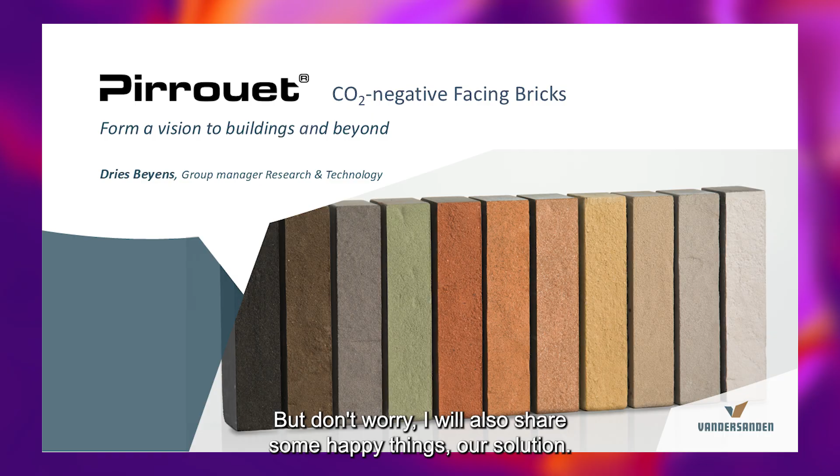My name is Dries Beyens. I'm the leader of the Research and Technology Department of Pirrouet, our new technology. I will start, but first I will tell you that I do not have good news all the time. I will start my keynote with some disturbing news and disturbing facts. But don't worry, I will also bring some happy things, our solution. So before everybody is depressed, we will bring the good news.

Okay, what are the problems or the challenges that we have today? First, in 2019, we had the COVID pandemic, then the recession, followed by climate change, because it was more a hot topic, and then biodiversity became more important, and for several years now, we also have wars taking place.

At Vandersanden, I go a little bit more into detail about climate change, because we as Vandersanden are a facing brick company. So we use natural gas and we have an impact on climate change. But we can also have a positive impact, of course, with our solution.

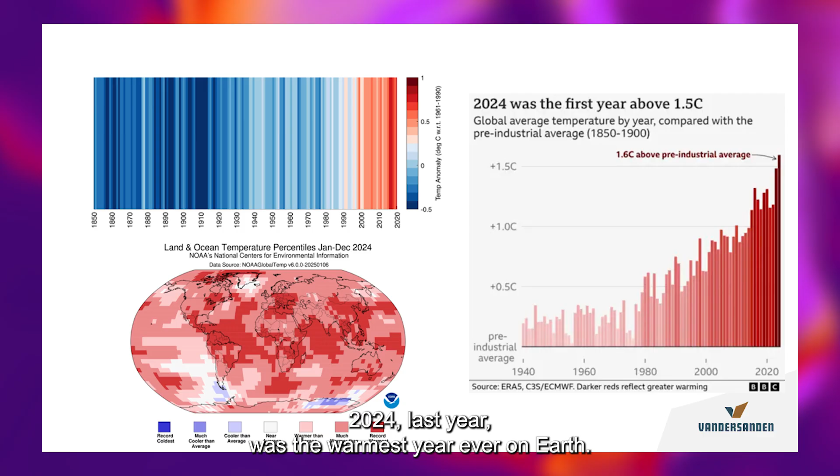Some facts, some figures. I won't go too much into detail, but the right graph on the slide is maybe the most important graph. 2024, last year, was the warmest year ever on Earth. And for the first time, the temperature increase was more than 1.5 degrees C compared with the pre-industrial period. Also on that graph, you see that the last 10 warmest years all occurred since 2015.

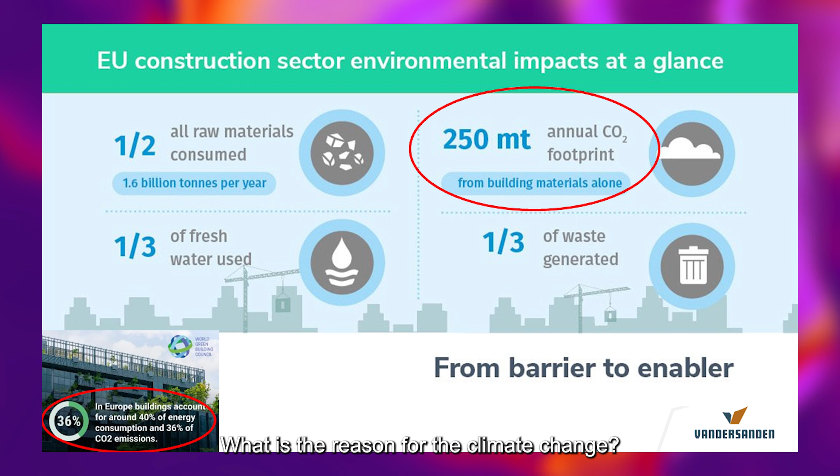So what are the consequences or the causes? We all know the weather is changing, with some terrible consequences. What is the reason for climate change? That's of course the CO2 emissions in the atmosphere. We in Europe are responsible for 250 megatons a year from the production of building materials. The total building and construction industry is responsible for 36%, so one third of the total CO2 emissions is because of the building and construction industry.

Everybody is still happy, I see. No? Yes? Now I come with the good news. I come to our solution.

As Darwin said, how should we react? It's not the strongest or the most intelligent one that will survive, but the one that is most adaptable to manage change. That is how we as Vandersanden act and react, with our long-term vision on sustainable solutions and strategies.

We as Vandersanden are a 4th-generation company, and this year we exist 100 years. We are not thinking in years, we really think in generations. That is how we act as Vandersanden. This strategy gives us a leading position in sustainability and innovation, with our slogan, for decades long, together we build greatness. In this philosophy, we developed our sustainable program, Together to Zero.

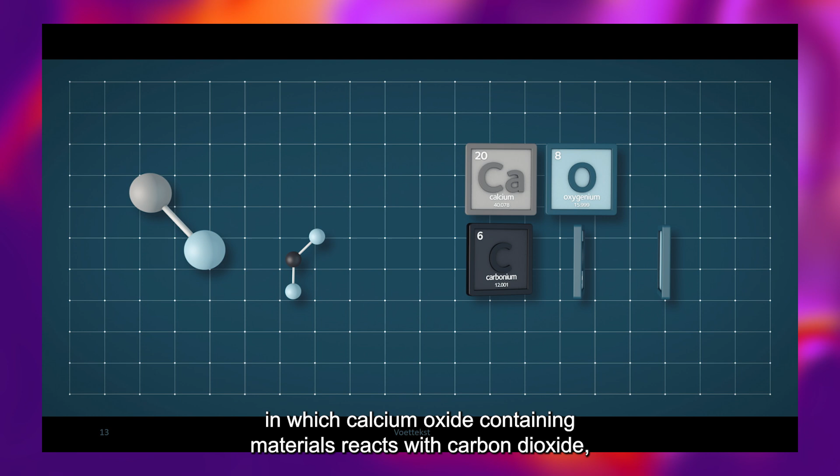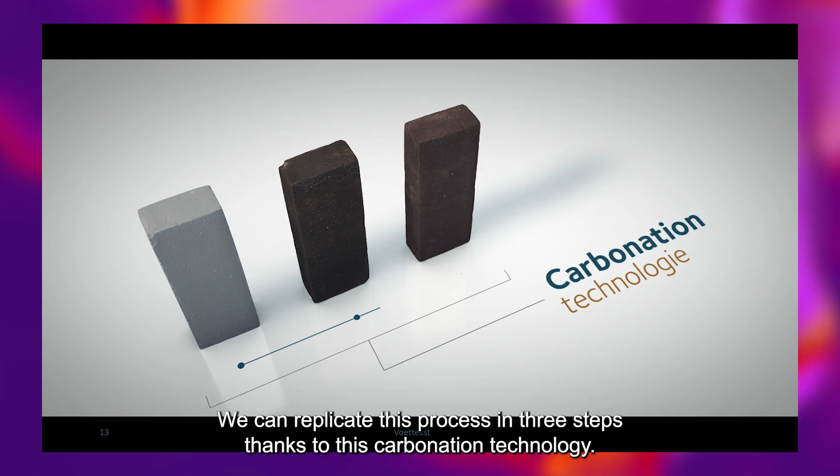Carbonation is a chemical process in which calcium oxide-containing materials react with carbon dioxide, forming insoluble calcium carbonate. We can replicate this process in 3 steps thanks to this carbonation technology. In the first step, we mix mineral waste products from the steel industry, sand, any colorants, and water. This saves up to 80% on primary raw materials.

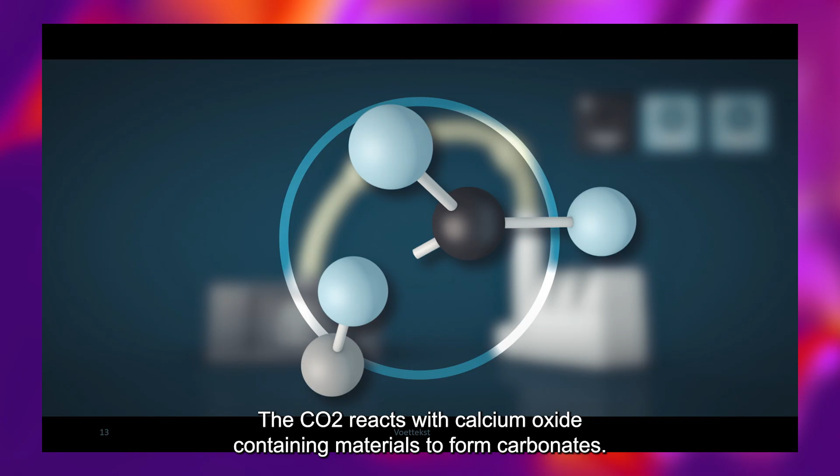During this process, as much as 60 kilograms of CO2 per ton of finished product is absorbed and captured. This process takes 1 or 2 days, does not require any additional energy, and does not produce any waste. With the production of the CO2-negative Pirrouet facing bricks, Vandersanden is taking the next step in changing its production processes for a sustainable future.

A small summarization about the production process. So how does it work? We mix sustainable, low-impact materials. They are minerals from the steel industry. We mix that and we don't use any other binders. So we don't use cements or geopolymers to bind it, only the raw materials that we get from the steel industry. We press them with green energy.

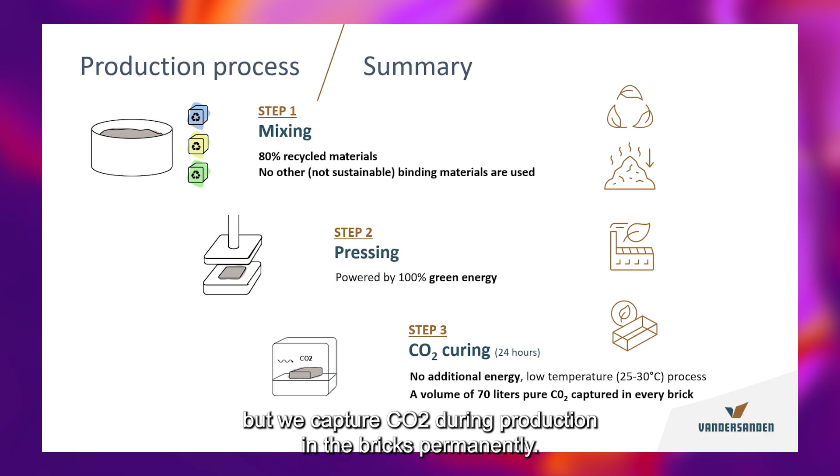All the processes are consuming low energy, also fully electrical, and we have our own green energy because we have our windmill and solar panels on site. The third step is the curing process when they are formed, and in the curing, we don't emit CO2 for the production, but we capture CO2 during production in the bricks permanently. So every facing brick around this size will capture during the curing a balloon of 70 liters of pure CO2.

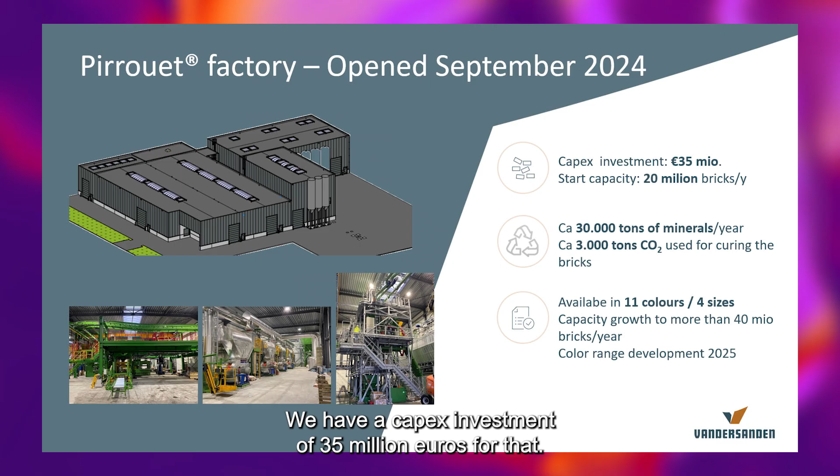Then we built a factory for it. The factory opened last year in September. We have a capex investment of 35 million euros for that. The startup capacity is 20 million bricks a year. We can scale up to more than 40 million bricks a year. We use for that 30,000 tons of minerals, and we use for the curing 3,000 tons of CO2. 3,000 tons is comparable with what 115,000 trees will absorb in 1 year. So it's amazing.

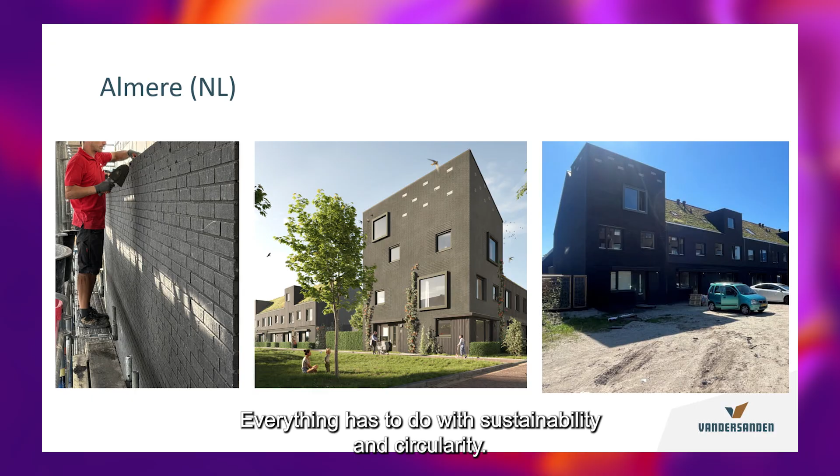Some of our first references: a big project in the Netherlands, our first project in Almere, where everything has to do with sustainability and circularity. These were 60 family houses. They used our Pirrouet bricks. They used hemp insulation. You see on the render the green roofs, and to promote biodiversity, they also put some birdhouses upstairs in the roof. It's very popular in the Netherlands at this moment.

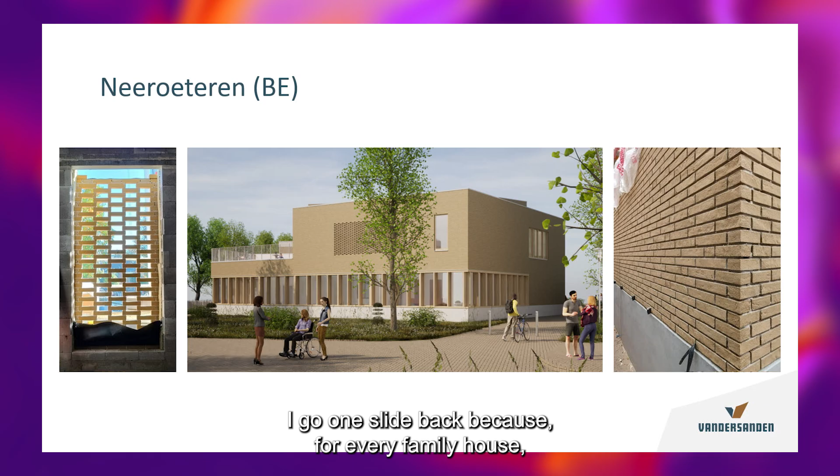I go 1 slide back because for every family house made with Pirrouet bricks, the CO2 uptake is permanent, so it will not escape anymore during lifetime and also not after lifetime. 1 family house with Pirrouet bricks is the same as what 1 tree absorbs in 28 years. Our next reference in the east of Belgium, in the Neeroeteren Cultural Centrum, they masoned the bricks with lime mortar. So they look to the lifetime and they are able to reuse the bricks after lifetime.

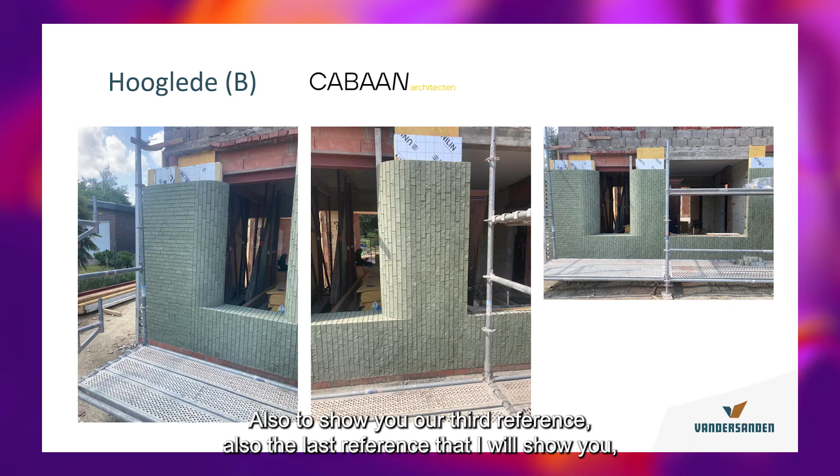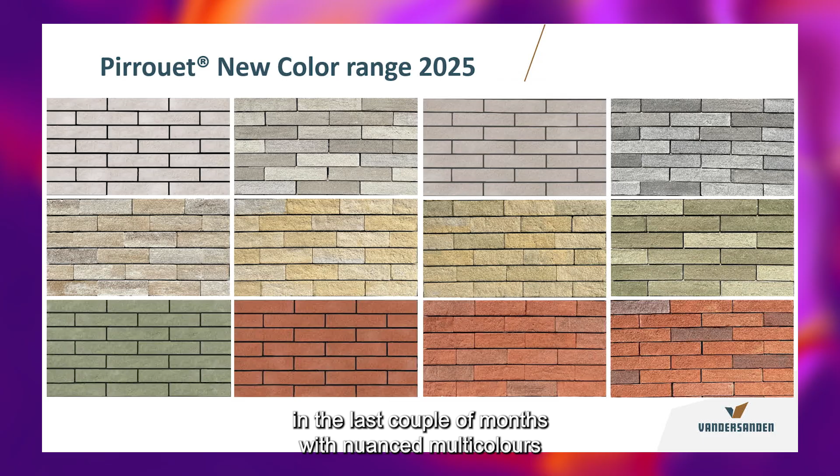This is our third reference, also the last reference that I will show you. With our Pirrouet bricks, it's a renovation project. So you can see that renovations are also very good to use the Pirrouet bricks. This is our new color range that we developed in the last couple of months with nuanced multicolors that give a warm ceramic look and feel.

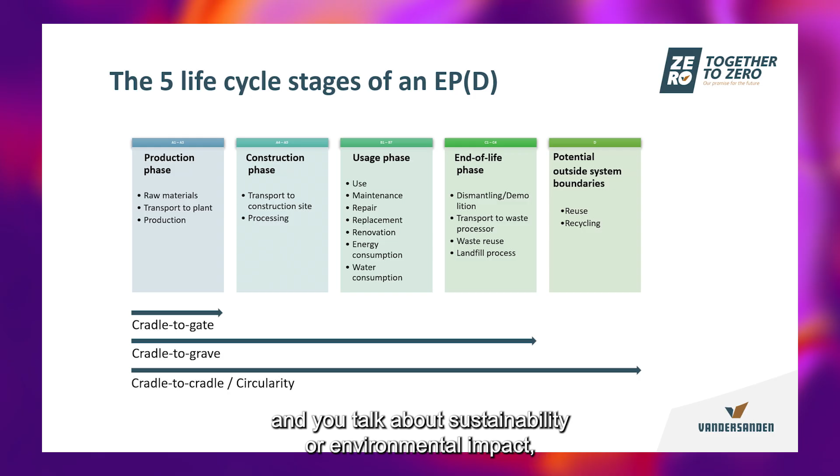Then how sustainable are they? I told several times already, they are carbon negative facing bricks, but I don't want to tell a greenwashing story, so I will explain and prove that they are sustainable and CO2 negative from cradle to gate in the production phase. When you look at products, not only building products, and you talk about sustainability or environmental impact, you not only look at the production phase, but also at the other phases, the whole LCA, the life cycle of the product, of course.

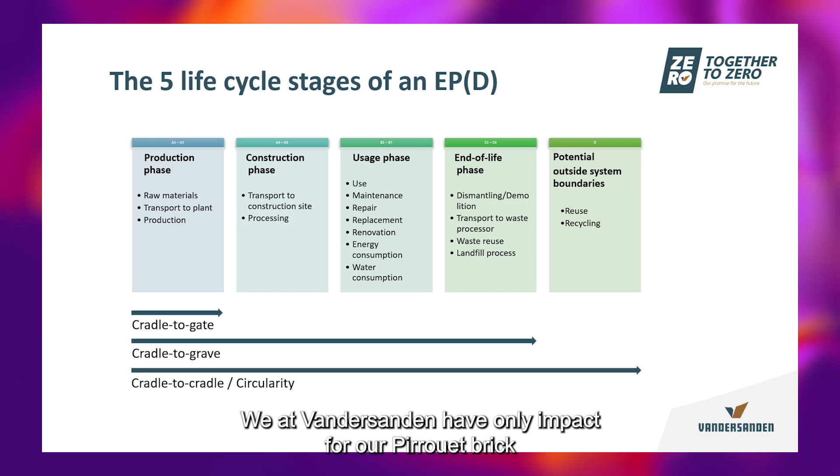We as Vandersanden have only impact for our Pirrouet brick in the production phase, from cradle to gate. So now I'll show you an infographic out of our official sustainable impact documents to prove that it's CO2 negative. The production phase, cradle to gate, has 3 parts. The A1 part, resources extraction of our raw materials. This will have an impact of around 13 kilograms CO2 per 1,000 kilograms of bricks.

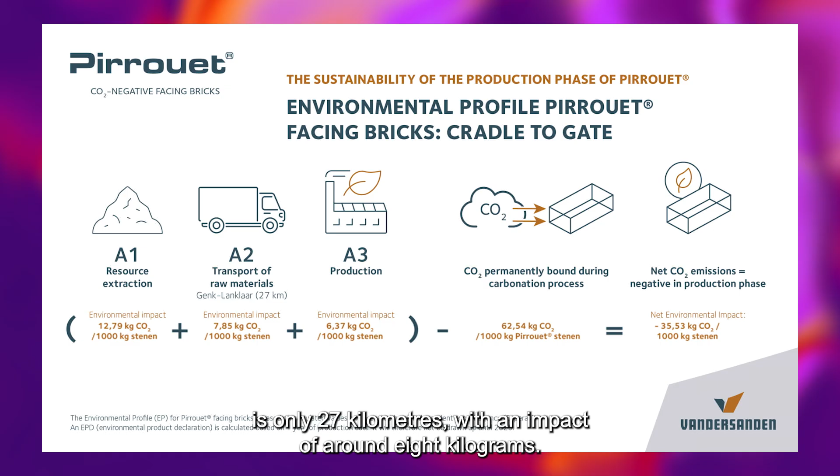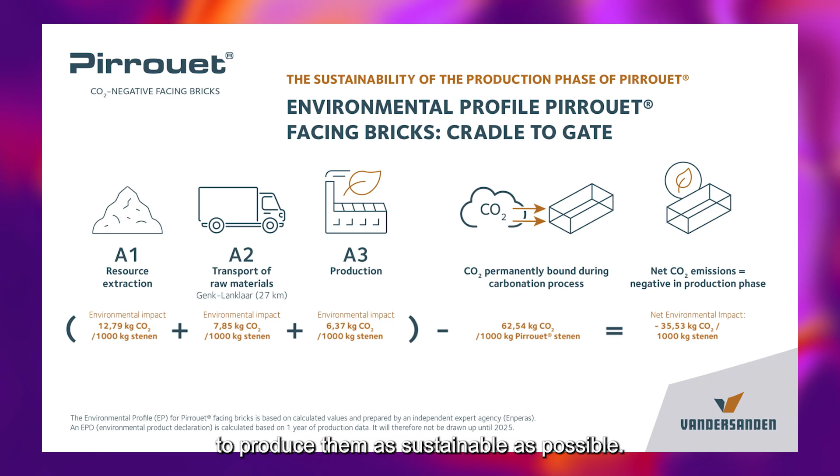The transport from Genk, Aperam, our supplier Orbix, to our plant in Lanklaar is only 27 kilometers. That will have an impact of around 8 kilograms. It's amazing to see because our production of the bricks itself will have only 6 kilograms of CO2 impact because of the green energy and all the other things that we do to produce them as sustainably as possible. You see that the 6 kilograms has a lower impact than the transport of the raw materials to our plant. Then we capture during production around 60 kilograms per 1,000 kilograms, so minus, and then we come to a CO2 negative product of 35 kilograms per 1,000 kilograms of bricks.

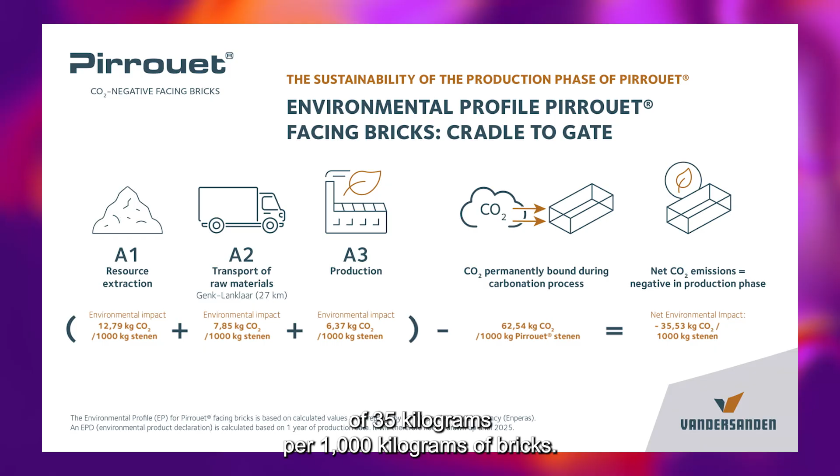Then the processing of the bricks in a traditional way: we let it test officially also with standard mortars, so the bricks can be used very easily and masoned with standard mortars, with standard lime mortars, so everything is possible. But we look more into the development of dry stacking systems or to use lime mortars, of course, because that makes it more sustainable. When you mason a CO2-negative carbon Pirrouet brick with a cement mortar, you lose all your sustainability.

Then we come to the last part of the presentation. It's my personal development that we started 3.5 years ago, so you can say it's a little bit my baby. We started 3.5 years ago by thinking, should we produce this technology? We know the technology, we mix the raw materials, we press them, we cure them. Should we produce the standard brick sizes, Waal format, a thick format that's popular in the markets? Of course we need to do it because it's our biggest market. But can we do something special, something very creative, the most creative that you can do with the wall?

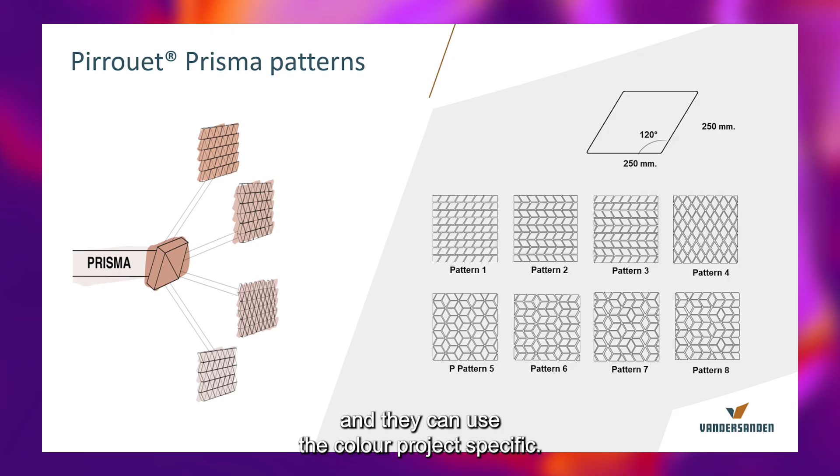And I made some drawings, some sketches of triangle sizes of bricks, pentagons, hexagons, I did everything. And the conclusion was a diamond shape with corners of 60 and 120 degrees is the most creative way to build a wall. The architect or the client, end customer, can use a stacking pattern. They can choose the front shape of the brick by themselves and they can use the color project-specific. Then we made some renders to show an architect and end customer how it can be.

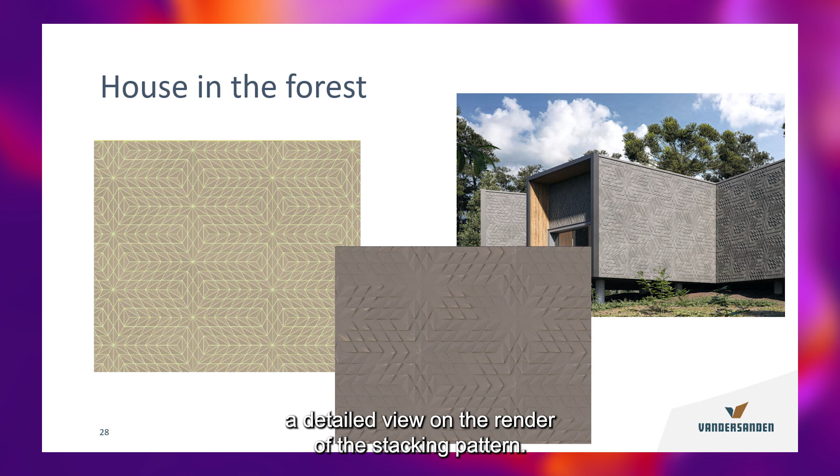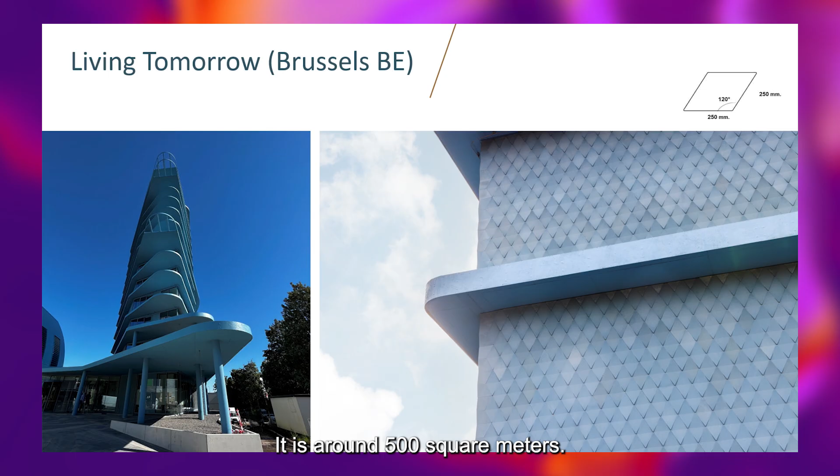Now we come to the real stuff, to our references. The first reference is in Brussels, Living Tomorrow, the building, the tower in Vilvoorde. It was already built around 2 years ago. That was our first project. Around 500 square meters, and you see here sustainability, circularity and aesthetics go hand in hand. Here are some detailed pictures of the Living Tomorrow building.

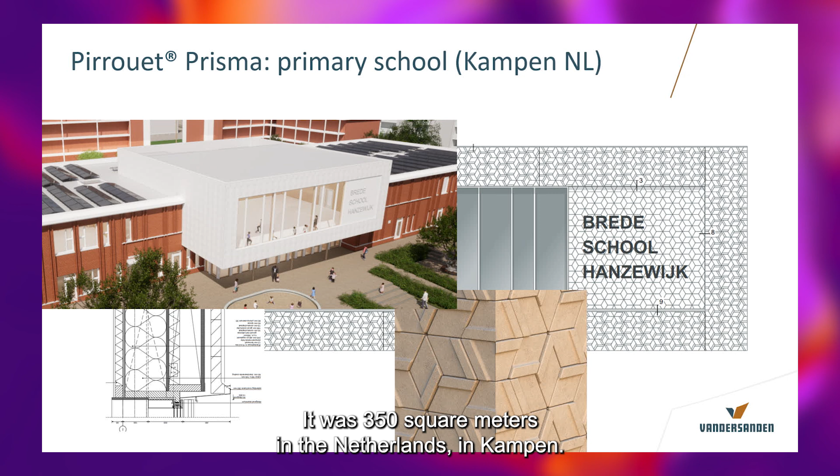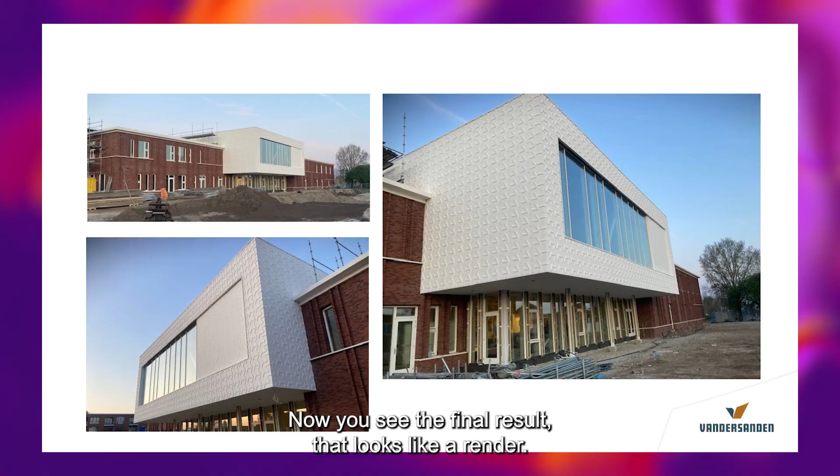This project we stacked around March this year. It was 350 square meters in the Netherlands, in Kampen. It's the most sustainable school in the Netherlands. The white part in the building is the gym location, and that is foreseen with our Prisma system. They had foreseen 13 weeks to install the system, and they were ready with the 350 square meters with 3 persons in 5.5 weeks. Now you see the final result. It looks like the render. It looks very beautiful. So you can do whatever you want with this system.

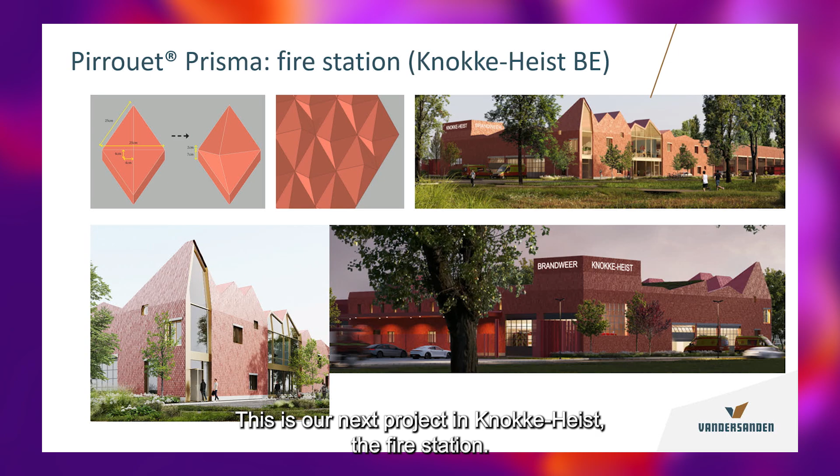This is our next project in Knokke-Heist, the fire station. We need to start stacking in September. 750 square meters. You see the same stacking pattern as Living Tomorrow. Another front shape, another color, and you create a totally different look and feel.

You will see the Prisma meets today's facade needs: superior in sustainability, an unlimited new creative freedom, and a high-end facade for the end customer. Hopefully you will see that our Pirrouet bricks and our Prisma bricks are not just another brick in the wall. Then I will end with a small video of our factory, the installation with a time-lapse camera of the equipment, also a little bit of the production process, and our first project in Almere.